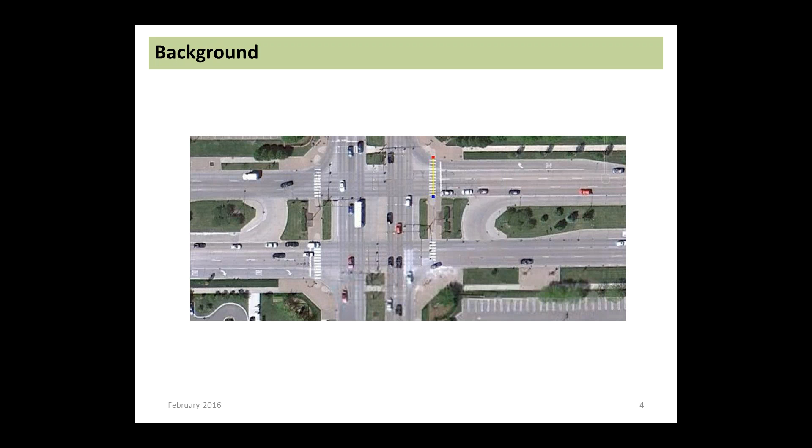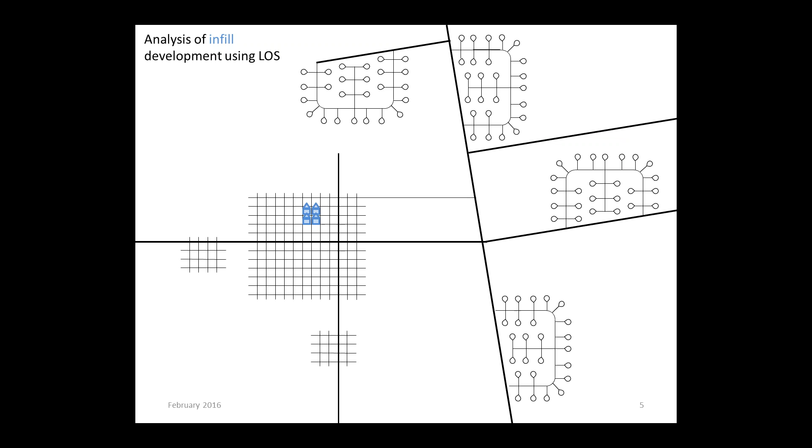Okay, so background. Why are we here? Why was 743 passed? I'll start off with a diagrammatic example of use of LOS in infill to start to answer that question, and then we'll dig in a little further. So in this diagram, you have an infill development built in a central city. There's outlying suburbs or exurbs on the top and to the right. That infill development will load relatively little vehicle travel onto the roadway network. It's relatively little because the infill development is centrally located. It's likely to be located near transit lines or good bicycle or pedestrian facilities in a more walkable neighborhood in the center with destinations that are closer.

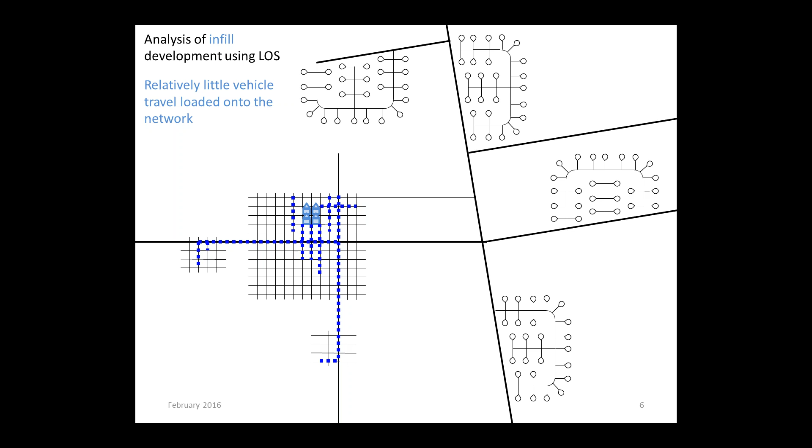And yet, even though it loads relatively little vehicle travel onto the roadway network, it triggers numerous LOS impacts. And the reason for that is that infill development is by definition last in, and so the traffic generated by the development is layered onto the existing traffic, where level of service is frequently already near a threshold, leaving that last-in development to trigger the threshold and holding the infill development responsible for mitigation.

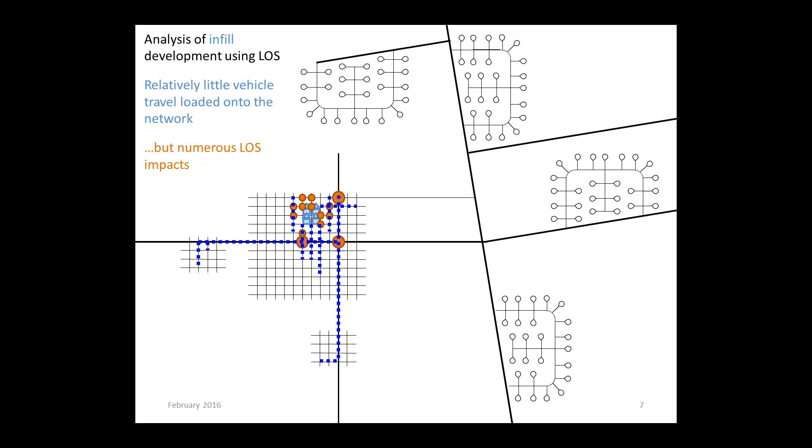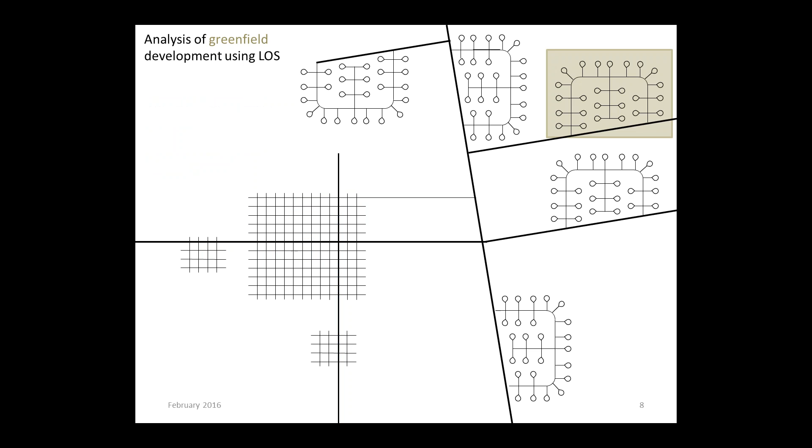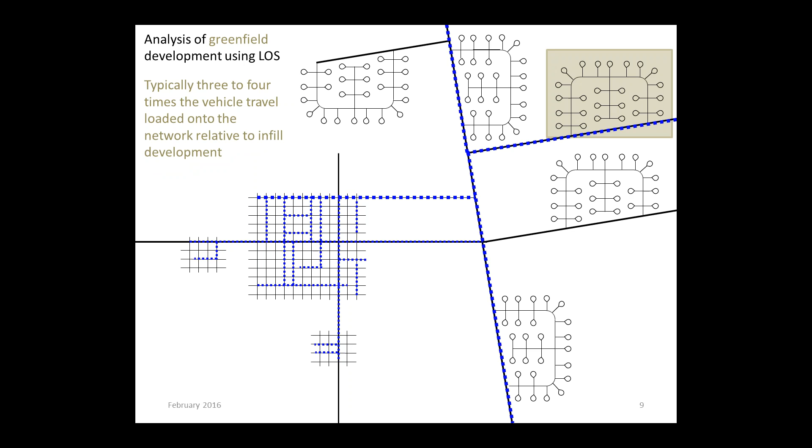So let's compare that to an example, greenfield development, a development on the outer edge of an urban area. That development will typically load 3 to 4 times the vehicle travel that the infill development loaded onto the regional roadway network. And yet it'll typically have less in the way of LOS impacts. And that's not that it's causing less congestion or adding less travel. Again, it's adding 3 or 4 times the amount of vehicle travel typically. But traffic generated by the project is dispersed enough by the time it reaches congested areas that it doesn't trigger LOS thresholds, even though it does contribute broadly to regional congestion.

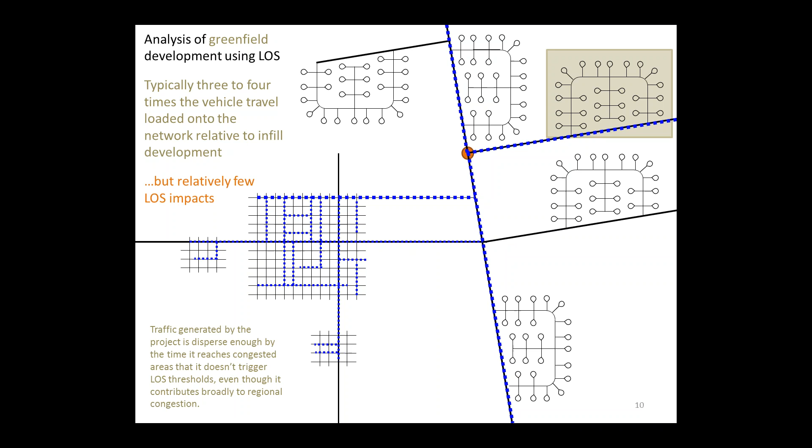The first, essentially just illustrated, it punishes last-in development, inhibits infill, and pushes development outward by assigning all of the impact, or a disproportionate amount of the impact, to the last-in development. That makes last-in development less viable and outlying development relatively more viable. And in our state, that's an issue because we are endeavoring to reduce greenhouse gases with infill development and accomplish a number of other state objectives by focusing on developing infill over outlying and greenfield development.

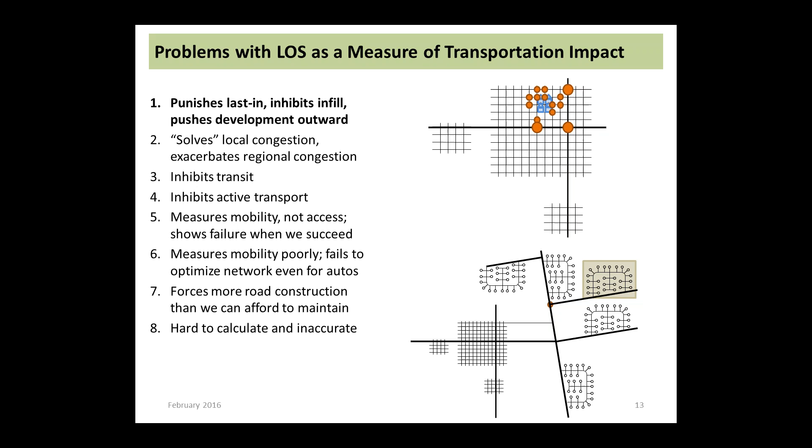Second, while mitigating LOS can solve local congestion, at least for a time, it exacerbates regional congestion, and that's because accommodating the automobile and all demand for automobile travel leads to more automobile travel, and that is loaded onto the region's roadway network where it congests.

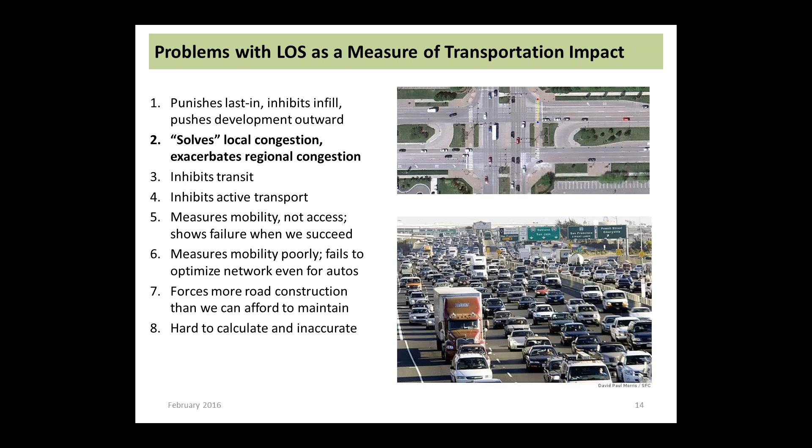Third, use of LOS in CEQA acts to inhibit transit, the development of transit projects. A busway, for example, a bus rapid transit project including a separated bus lane, will sometimes leave less space for single occupancy automobiles, even as it moves quite a bit more people down a corridor.

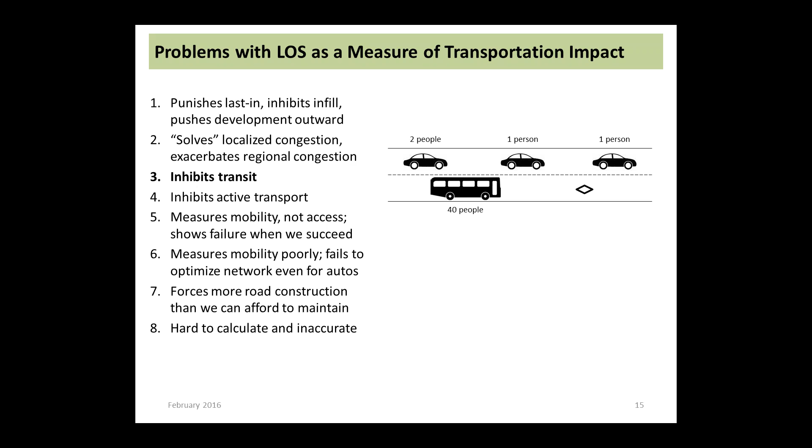And LOS mitigation can lead to the project needing to make decisions to compromise the bus service in order to accommodate additional single occupancy vehicles in a way that can even reduce person throughput on the corridor. So it sees vehicles rather than people, is one way to put that issue.

Fourth, it inhibits active transportation. So the LOS metric inherently sees pedestrians and cyclists as impediments to transportation rather than transportation in their own right. And so mitigation for LOS can look like prohibiting or reducing the facilities for pedestrians and cyclists. Now this is important for a number of reasons, and I'll just touch on a few of them here.

One is that active transportation obviously is emissions-free. It contributes especially to vibrancy in neighborhoods and eyes on the street from a planning perspective, but also facilitating active transportation has enormous health benefits. There have been studies showing that in regions in California, getting active transportation up to a larger mode share, and folks walking and biking for just several more minutes a day, can reduce healthcare costs by billions of dollars.

Fifth, LOS is, roughly speaking, a measure of mobility rather than a measure of access to destinations. And that's a problem in a state that is endeavoring to solve its transportation and environmental problems by putting uses closer together, by using proximity. So access to destinations comprises both proximity and mobility, and a mobility metric just sees half the picture.

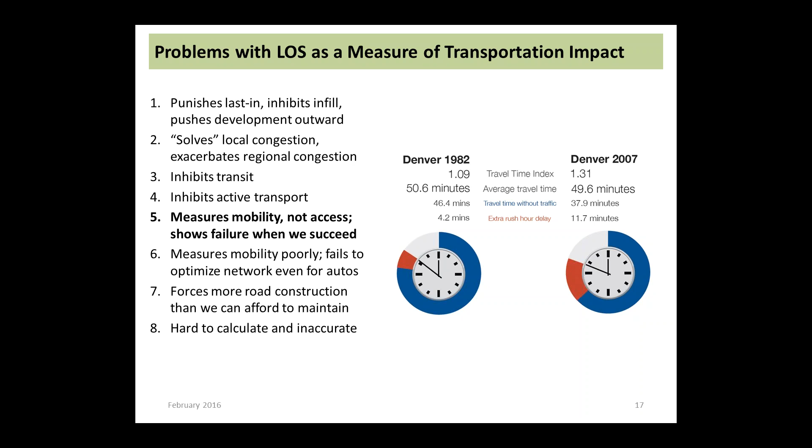And what Braess's paradox says is that you can relieve a bottleneck. You have traffic congestion, you add a lane, or you somehow relieve a bottleneck. And just doing that without considering induced travel, without considering any other factors, can end up worsening traffic if that traffic then goes downstream and worsens an even more important bottleneck, and causes even more system delay than you had in the first place.

So this is an illustration that use of LOS in CEQA on an intersection by intersection basis is not optimizing the roadway network even for automobiles, even before considering other modes, and even before considering environmental factors.

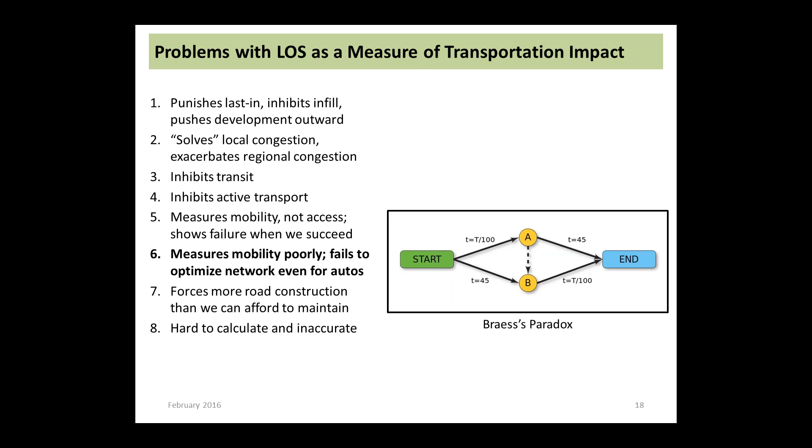A seventh issue stakeholders brought to us was that LOS used in CEQA forces more roadway construction than we can afford to maintain. So if in reacting to a CEQA significant impact on LOS, we lay down additional pavement in order to accommodate additional vehicle travel to improve the LOS of the intersection, we're contributing to a pre-existing problem, one that exists in nearly every jurisdiction in the state. There are a few exceptions, but there are very few local jurisdictions, cities or counties, which can show how they will pay to maintain their existing pavement. So it's exacerbating a potential and forthcoming fiscal problem.

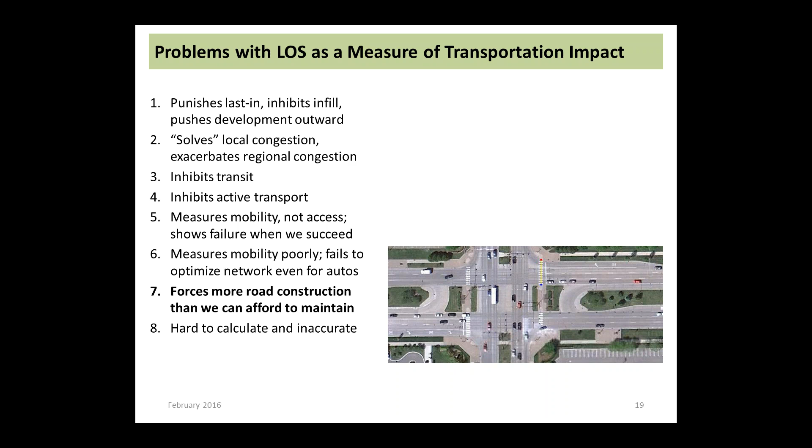And finally, LOS is hard to calculate and inaccurate. So in order to calculate LOS, a first step is to run a transportation model that includes the project and show what the additional vehicle travel will be and where exactly it will go, because it's important to know which intersections it will travel through and even which turn lanes or through lanes the traffic will use in order to calculate LOS. Except for very large streets, the error on that calculation in modeling is substantial, on the order of a third or so, 30 to 40%. Once you have that number, you can do micro-simulation in order to find out what the delay will be and translate that into LOS, adding further error.

The numbers behind LOS are frequently reported to 3 or 4 significant figures, but in fact, we don't really know them even fully to one significant figure. It's not to the 10% that we have an accurate answer on what the delay will be through an intersection. So those are the issues that were brought to us.

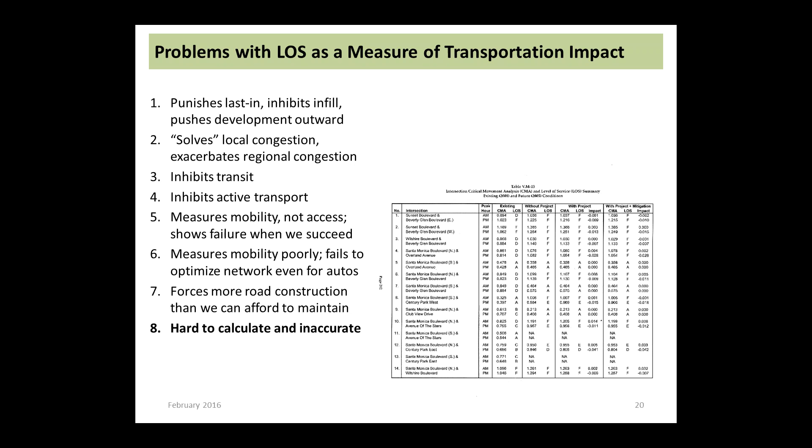I'm going to just skirt through the process that we went through in order to land on the metric vehicle miles traveled. We put out a preliminary evaluation listing the metrics that had been raised to us. There was, it's reasonable to say, I think, consensus on vehicle miles traveled, and I'll discuss some of the benefits of that in a moment, but first there is a clarifying question. Yeah, and I think you've touched on this a bit, but we had a request to give a little background on SB 743 itself, its current state, some of the politics, etc.

Right, that could be a whole webinar in itself, but I'll answer it briefly. SB 743, some of you are probably familiar, did a few things, one of which was to provide CEQA streamlining for the arena in downtown Sacramento, another of which was to direct our office, the Office of Planning and Research, to develop a replacement transportation metric for automobile level of service standards. It required the CEQA guidelines to provide a shift away from LOS in transit areas, and then it also said in other areas, not within a half mile of transit, that we could look at any metric.

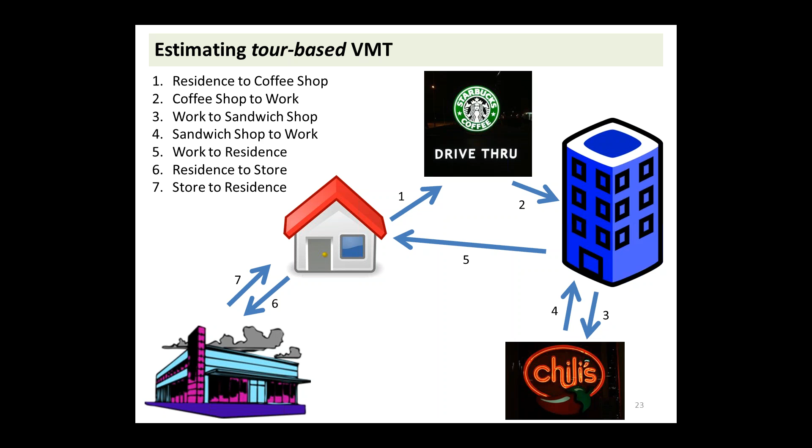Here we have a person in a household leaving on trip 1, going from their residence to the coffee shop, trip 2 from the coffee shop on the rest of the way to work, during the lunch hour taking trips 3 and 4 to and from the Chili's for lunch, and then at the end of the workday, trip 5 back home, and then in the evening, trips 6 and 7 to a store and then back home again. So this travel day consists of 2 tours. There's the work tour. Any tour that involves the workplace is typically called the work tour in tour-based VMT analysis or modeling.

Hang on a sec, we're getting a little feedback, so mute.

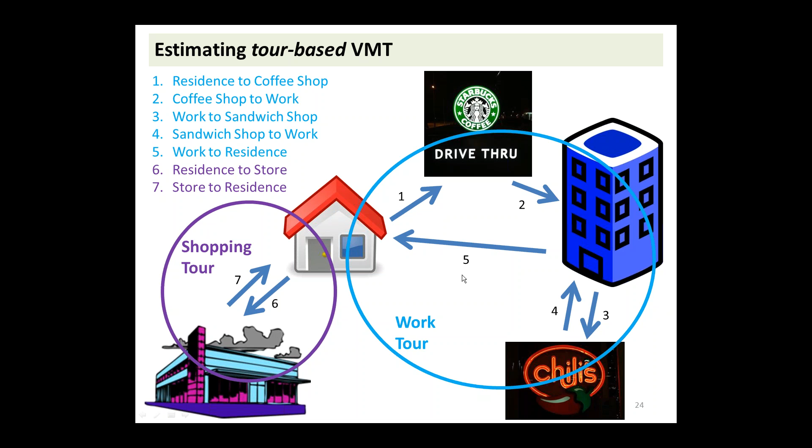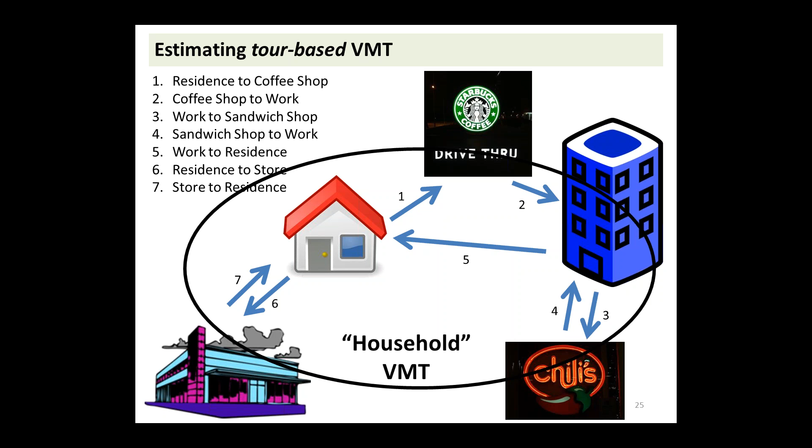Okay, sorry about that. And then the other tour is a shopping tour. It's not part of the work tour. Together, all of this daily vehicle travel is called household VMT, or in this case, one of the residents' household VMT. The full household VMT would be these travel patterns for everyone who lives in the house if there was more than one person. So let's compare that to trip-based VMT assessment.

So a different example, trip number 1 here is from home to work, and then 2 back from work to home. Trip number 3 is what would be seen in tour-based modeling as a shopping tour. It's a trip out for coffee, trip to the store, and trip number 5 again back home. So a trip-based model will be able to attribute the trips that have one end or the other at the home. So trips 1, 2, 3, and 5 comprise home-based VMT. Meanwhile, trip-based models cannot see that trip 4 is connected to the home. They just see it as a separate link. And so home-based VMT is, again, 1, 2, 3, and 5.

Now, household VMT, or a tour-based look, as you can see, is a more comprehensive view of household or office VMT. And so we recommend, where possible, using it. However, of fundamental importance, either tour-based or trip-based, it's important to use the same method for calculating project VMT, for calculating the threshold, and for calculating any mitigation. So where, for one of those 3, the information available is only trip-based, then we recommend using a trip-based assessment.

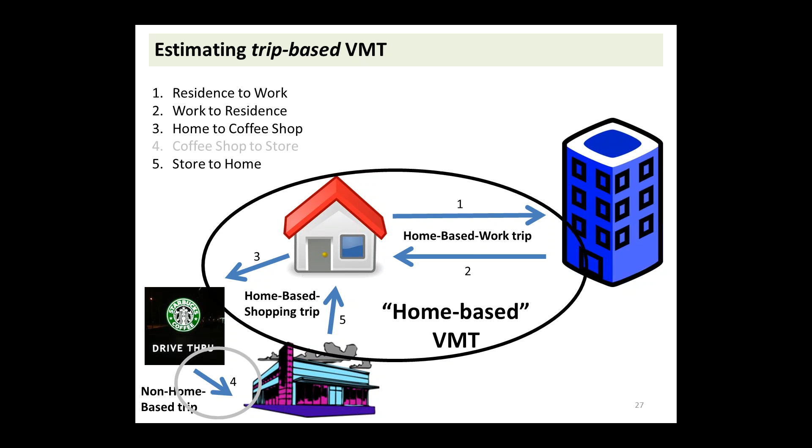I'll talk about this a little bit more when we get to case studies. Okay, so onward from there, let's talk about the draft we recently released. I'll talk a little bit first about what we've kept the same, and then I'll go into what has changed.

So we are continuing to recommend that the primary metric of transportation impact statewide is vehicle miles traveled. That's the same as in the previous draft. We are also recommending using VMT screening maps for residential and office projects. That's the same as our recommendation in the last draft.

And here we have an example in the picture to the right, which is at least part of the Fresno region's map, or a map developed for the Fresno region using the California statewide travel demand model. I'll talk a little bit more about that model and the data that is available from it a little bit later in this presentation.

But as you can see, there are low VMT areas, you can see in the key, green areas at which existing development exhibits low VMT. And so similar development in those areas would also be expected to exhibit low VMT, and therefore you could presume them less than significant. Now that's a very quick and easy way of streamlining a centrally located low VMT development. Again, we've carried that recommendation forward from the previous draft.

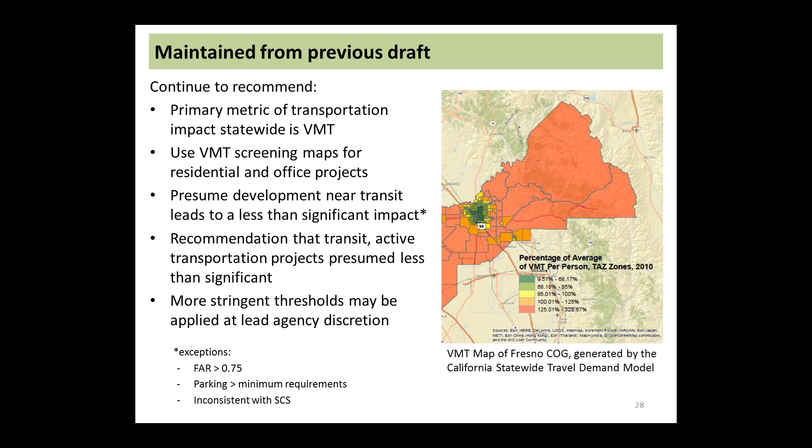Okay, and now I'm going to talk through some of the comments we received on the last draft we put out, and also talk about the updates that we made from the last draft. So one of the comments we heard from many people, many organizations, was that technical advice is better given in a technical advisory instead of included in the CEQA guidelines themselves. And so we have made an update and taken most of the content of our last draft out of the guidelines themselves and created a technical advisory and moved that information there. So now the guidelines update is on the order of a couple pages, and the technical advisory is 30-something pages.

So on thresholds for various project types, we'll start with residential projects. Some comments we received on the recommendation we made for residential project threshold. A couple we heard most were, first, that there needs to be some flexibility in threshold setting. There was concern among outlying cities that focusing on the regional overall VMT per capita would leave their entire geography triggering significant impacts.

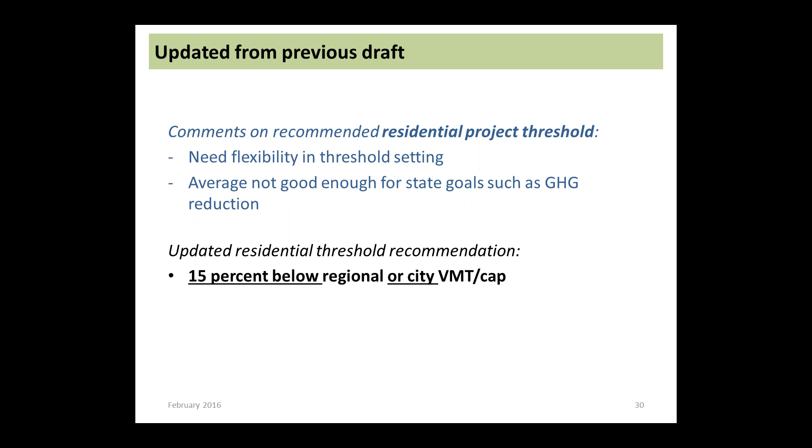Okay, and on to our recommendation for office projects. There we heard a similar comment: average is not good enough for state goals such as greenhouse gas reduction, and so we updated the office threshold to 15% below regional VMT per employee. We focused on the regional geography for office because commute trips are the longest daily trips and frequently cross city boundaries, so it made sense to keep a regional focus.

So I want to talk a little bit about why 15%, because we've gotten that question a lot, and without going through that, it might seem arbitrary. I would mention that, regarding the recommendations that we provided for thresholds, as I mentioned earlier, our guidance is explicit that jurisdictions can provide more stringent thresholds. But the thresholds we're recommending provide sort of a backstop of the threshold levels that, looking across state policy, we see would be in line with state policy that's established.

So I'll get into this in a little bit more detail by describing where the 15% came from. A first place is Caltrans' strategic plan, which specifies a reduction of vehicle miles traveled per capita of 15% by 2020. SB 375 has targets for the metropolitan planning organizations of the state, and if you add those up across the state, the overall target is around 15% per capita reduction. AB 32, in the current draft of the scoping plan, recommends local governments set greenhouse gas reduction targets at 15% below existing by 2020.

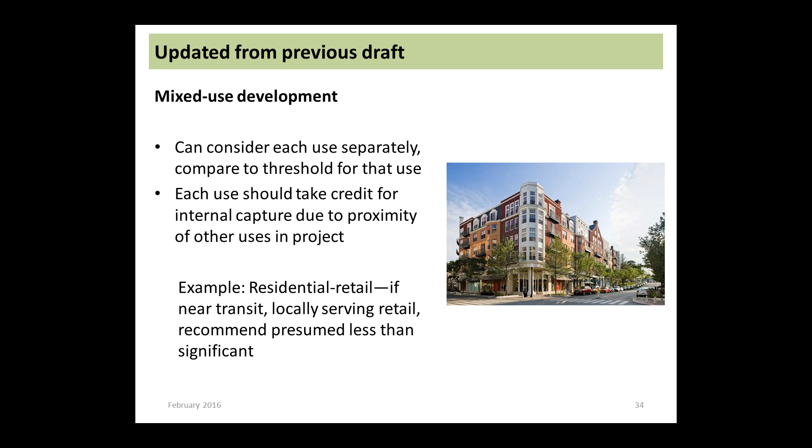For land use plans, for specific plans, we recommend using the same methodologies and significance thresholds as land use projects. For general plans, for whole jurisdiction plans, we recommend that consistency with the SCS in aggregate across the jurisdiction indicates a less than significant impact. For regional transportation plans and sustainable community strategies, significant VMT reductions to achieve the ARB specified GHG targets, our recommendation is that achieves a less than significant VMT impact.

So let's talk a little bit about transportation projects. I mentioned earlier that transit and active transportation projects we recommend presumed less than significant, and that hasn't changed. There was widespread agreement on that in comments, but we did get some comments on roadway project methodology. Two of the comments we heard frequently were that, first, the analysis might be burdensome for small transportation projects.

So we recommended two methodologies in the previous draft. Each of those included operating a travel demand model and then including an estimate of land use effects. And for a small project, say a turn lane or a small addition of lane miles, we heard comments that it was overkill, and we agreed. Those methodologies can be applied to larger roadway expansions that include a number of lane miles, and I'll talk a little bit more about that.

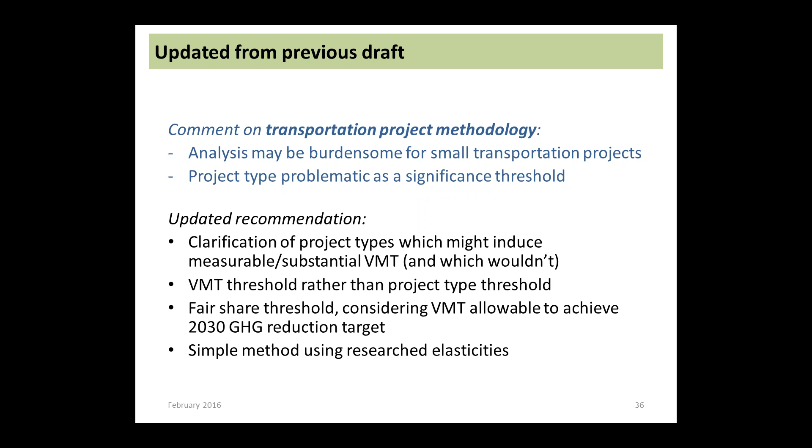A few other comments. First, we heard that rural is different. There are some cases in which rural can do quite a bit of VMT mitigation, and there are certainly cases where VMT mitigation is a challenge in rural areas. So we recommended that rural projects choose thresholds on a case-by-case basis, that they don't necessarily use the regional VMT per capita minus 15% that we've recommended that MPO areas use.

Second comment we heard is that very small projects might trigger significant impacts, and therefore EIRs, because of the use of an efficiency measure, VMT per capita. So we recommend a small project screening threshold of 100 vehicle trips per day. Below that, a presumption of less than significant.

And in comments we heard concerns about impacts to transit, and so we updated to clarify that addition of riders is not an impact per se, but blocking of transit stations or transit routes may be an impact, may constitute a significant impact.

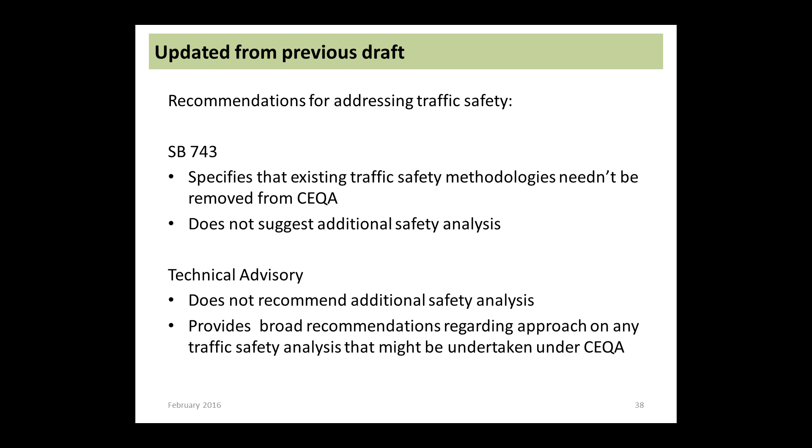So a review of the recent literature, recent in the last decade or two, produced four, I would call them guiding principles for addressing traffic safety, and we share those in the technical advisory. The first of those is reducing motor vehicle speeds. The second is increasing driver attention. So those can go together. Reducing motor vehicle speeds reduces both the number of crashes and the severity of crashes, and thereby improves the safety of people, which we're trying to focus on in CEQA rather than the safety of vehicles per se.

Increasing driver attention has been found in the recent research as a key factor in improving safety. And this is a reverse of maybe some of the older traditional approaches to safety, where wider lanes and larger clear areas around surface streets were assumed to improve safety by allowing drivers the opportunity to make errors and have the chance to compensate before running into an object.

But it's been found through research that actually increasing driver attention by including narrower lanes in a project or vegetation alongside the road can actually lead to better safety, because drivers won't, for example, look down at a text message or use their phone otherwise, or adjust their radio if they perceive that it's not safe to do so.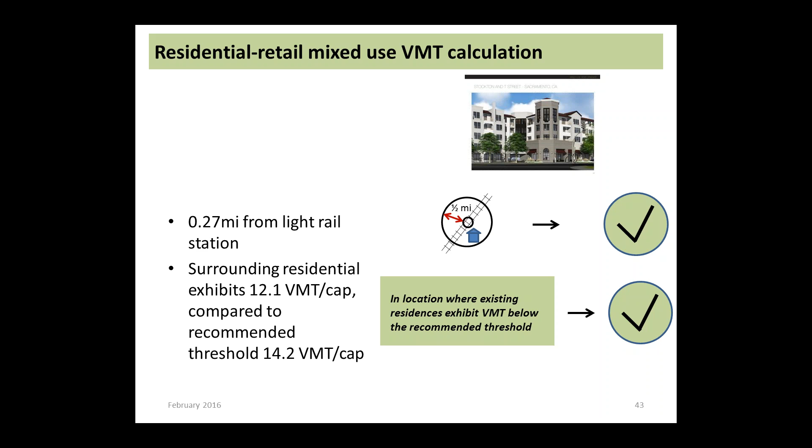We also recommend that retail development that's locally serving, as in this project, be presumed less than significant. So in this case, the analysis would not even need to be done, but we'll do it anyways just as an example here. And again, this analysis is shown in more detail in the latter pages of our materials posted on our website.

So for this project, in order to calculate the residential threshold, we use data from the statewide model, the California Statewide Travel Demand Model, CSTDM. And then to analyze the project, we used the AHSC greenhouse gas quantification methodology, which is posted on the SGC website. That methodology uses CalEEMod, and we made one variation to it, and that is to input trip lengths from the CSTDM. Now that's important because the data used for the threshold calculation and the data used for the project VMT calculation should be from equivalent data sources. And again, both from the CSTDM in this case.

We used home-based data because the mitigation calculation and the project VMT calculation required home-based VMT, so we couldn't use the household VMT or the tour-based VMT in this case. And then the project VMT mitigation is calculated within CalEEMod as a % reduction, so that's consistent as well. So we can check the boxes in that the project, the threshold, I've listed this incorrectly in the text on the slide, but the project, the threshold, and the mitigation are all in the same currency, VMT currency, all using the same type of modeling as well.

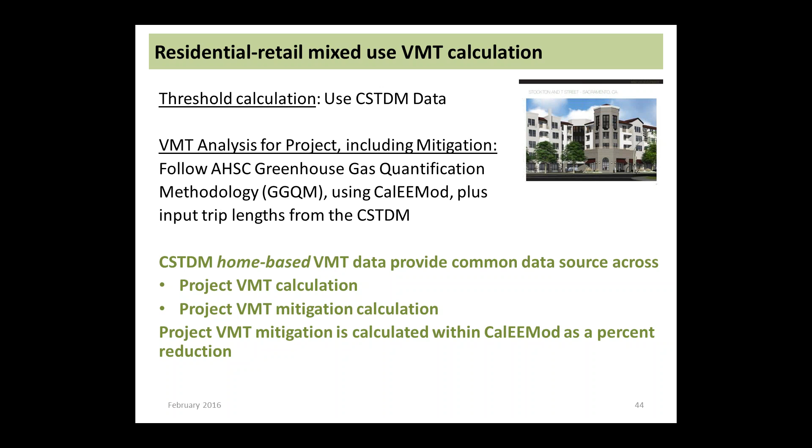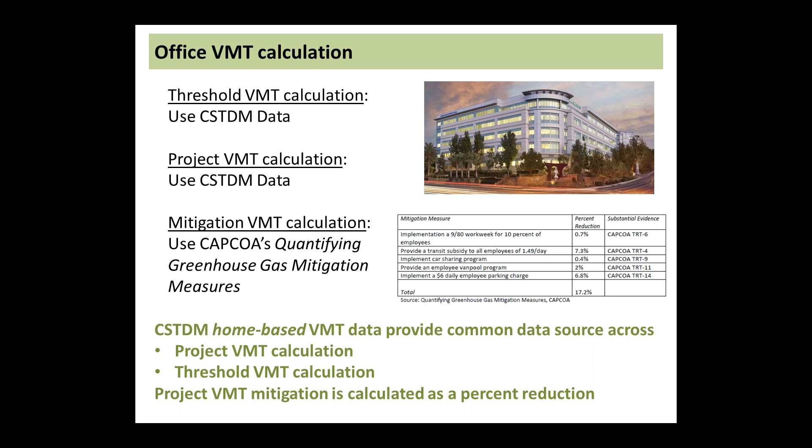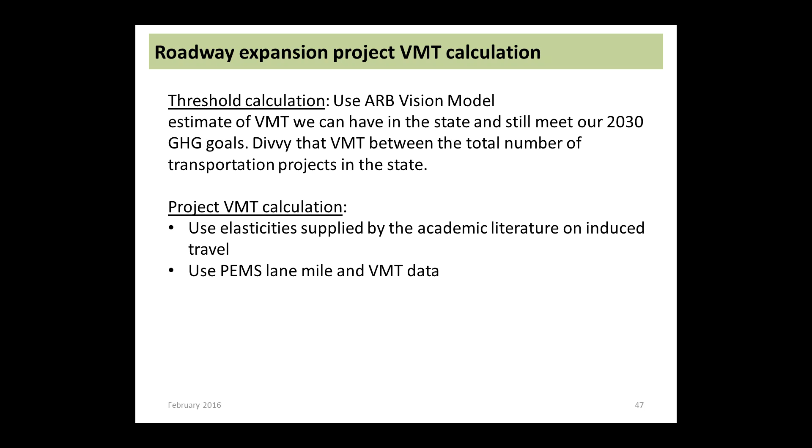So in order to do the calculation, we simply use the academic literature on induced travel. As I mentioned before, there are about 20 papers that quantify the induced travel resulting from addition of lane miles, and use an elasticity to do so. We got the data needed from PEMS data. PEMS data we use for lane miles and vehicle miles traveled.

So here's the math. The example project is a hypothetical highway expansion adding 2.2 lane miles to a highway, again, in Kern County. That's so we can pick the Kern COG region in which to draw the data from. So I described an elasticity earlier. Here it is on the screen.

An elasticity is simply a percent change in vehicle miles traveled divided by a percent change in lane miles. And again, an elasticity is what the academic literature on induced travel supplies. So do a little bit of algebra on that, and the VMT impact equals the percent change in lane miles times the baseline VMT on those lane miles times the elasticity. It's that simple. It's a very quick and easy calculation.

We plugged in the data. Again, it was PEMS data for Kern County. We plugged in the elasticity found in the most recent study, Duranton and Turner, 2011, the most recent major study on induced travel, to calculate the VMT impact. So percent change in lane miles of a 2.2 mile project is 0.328%.

The existing vehicle miles traveled on those lane miles is 2 billion and change. The elasticity Duranton and Turner found was 1.03. We rounded to 1.0. Multiplying those together, the result was 7 million and change VMT per year.